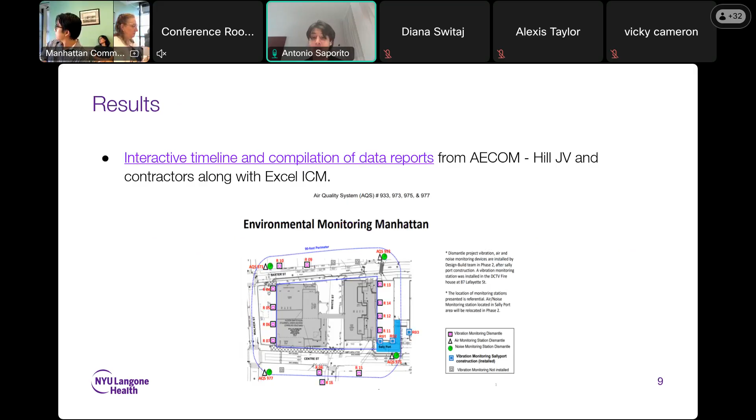As the community was updated every month, we made an interactive timeline and compilation of these data reports from AECOM, JV Hill, and the DDC. We made this online and put it in the packet as well, to give an understanding of all the projects going on concurrently and one after the next, to see the progression of the project. This is for us, and for the community, to better understand how this project was developing despite maybe some delays or some project completions faster than expected, but for us to know and better understand the project.

All right, thank you. So third, we went through and measured and noted the air pollution exceedances that were recorded. If you can go to the next slide, I think one really important takeaway is that these monthly reports often stated that no exceedances were noted. If there's one takeaway I want us, the community, to take from this part of the presentation, it's that the absence of evidence is not evidence of absence.

In spite of these reports giving us this data, they were incomplete for a lot of the months, and incomplete at different sections. So while these reports state that no exceedances were noted, how can this be true if there is a lot of data missing, if we were not able to capture the true concentrations that were emitted from the demolition site?

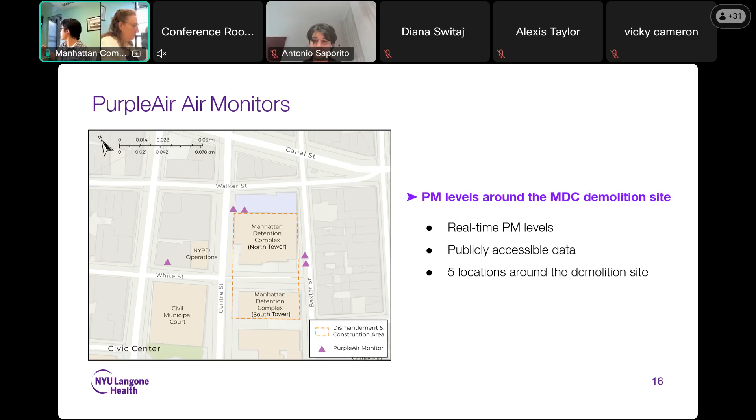And anybody has access to this data. Once it's online, you can go to their website and download the data and do the analysis yourself. We have that, and we also compare it to the levels around New York City. We use this as a baseline to see how much lower or higher the levels around the demolition site are compared to this baseline.

From first glance, what we've noticed is that the levels near the demolition site are consistently either a little bit higher or a lot higher than what's being measured in other parts of New York City. That is one of the red flags we want to point out. Another thing we want to point out is that the Purple Air monitor, even though it's great for things like PM10 or dust, the levels we see might be underestimated, so what we see here might be lower than what is actually being released into the air.

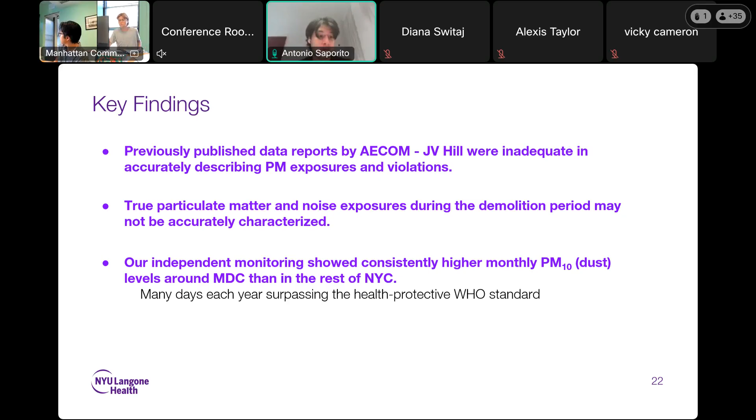And so our findings in this report are to better inform the community, better inform people going forward with other demolition projects, but also to ask for more. So thank you for your time, and we'd be happy to answer any questions.

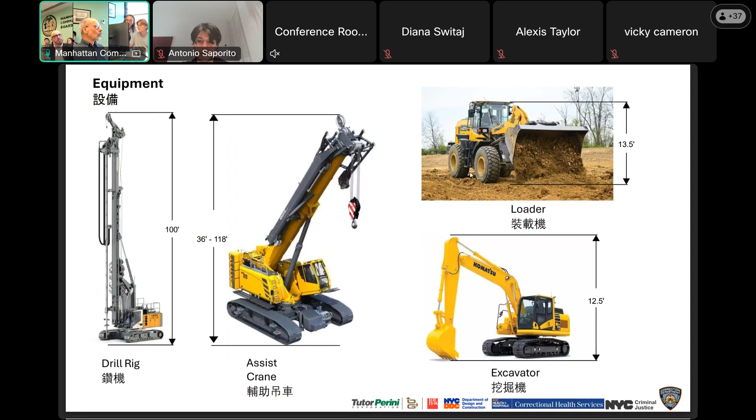So let's talk about deliveries. We talked about the early hours, and we do appreciate sleep, it's very important. But we are constrained for certain sizes of deliveries by the Department of Transportation. A number of these large equipment pieces that you just saw really cannot go through bridges past a certain time, and that's what's causing some of these early deliveries you've seen to date. These are really for the cranes, excavators, these large pieces of equipment required on site. So that's the constraint for the early deliveries anywhere from 4:30 to 7 a.m.

What you'll see this year are the casings, which are on those tubes. Those are part of the secant piles. We also have reinforcement bar, and of course, concrete.

This is the current condition of the site. You see the solid red lines along Baxter and Centre Street - that's our fence, taking one street lane there for traffic. We have the courthouse Sally Port to the south in that gold color. There's a lot of movement there with persons in custody coming in and out, so we coordinate with them almost daily to make sure there's no major conflicts with the buses, which is why the entrance is a little bit further north.

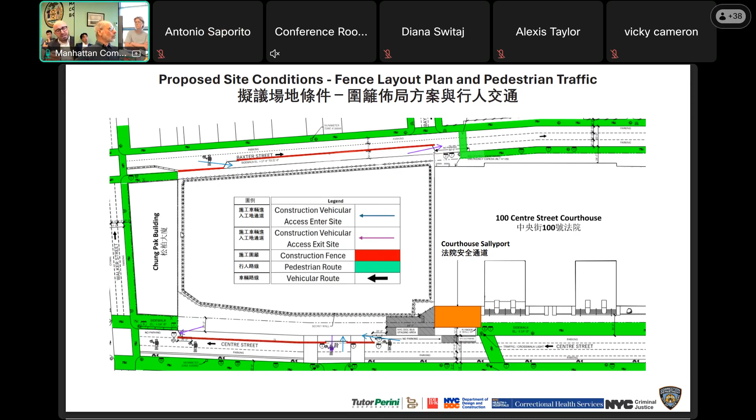Let's go to the next slide. So, work completed - last year, the majority of the work was site validation. We were looking at some borings for geotechnical verification, some environmental test pits to understand where the water level is, and some other details for engineering.

Some existing utility work - Con Edison has been active for the past year. They should be wrapping up within the next 6 to 8 weeks or better with our work around their site and within our site. We've done some utility work on Baxter and Centre Street, surveying, and of course installation of monitoring equipment, which we'll get to in greater detail.

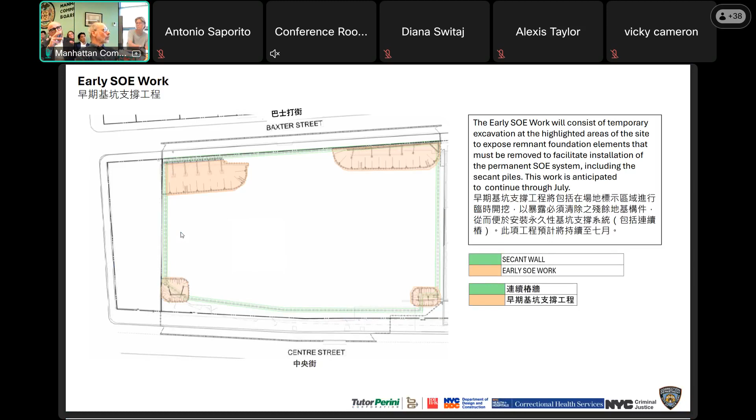2026, here's how we started construction this year. This was in April, when we started looking at these specific areas and began removing some of the old remnant foundation elements. These are the areas we want to focus on for that work.

Every one of those, what's in yellow? And how far down do those go approximately? Those are at the old cellar level, anywhere from 15 to 20 feet maximum.

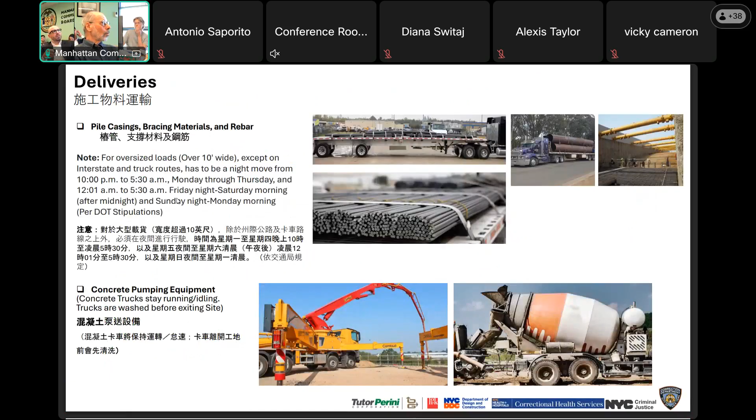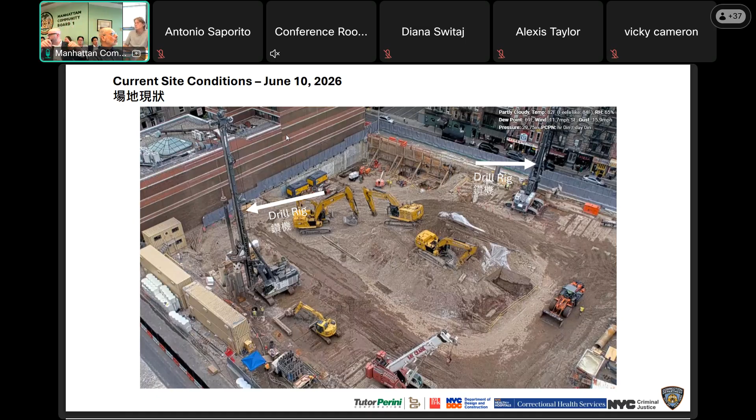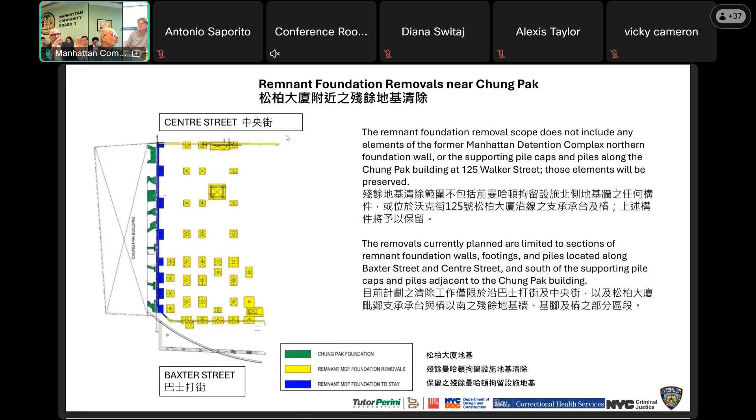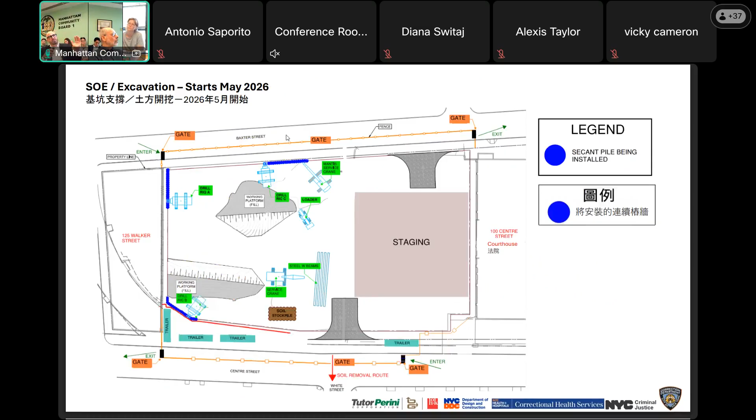So we talked about that - the main message here is that we're preserving the Chung Pak foundation and immediate adjacent footings from the old building. We don't want any impact on those footings. As of May last month, we started drilling, as shown in the aerial shot. The dark blue areas are the actual sequence. As we go further into the year, that operation will move south, toward the right of the screen, and that's when the purple rigs will start working. Those elements are casings, and they're actually part of the foundation.

A better picture to illustrate this - correct. So theoretically, and I don't want to get too technical, but this is the secant pile wall, which is in the perimeter. This serves as a barrier to isolate the water table, or the water.

Slurry? It's not slurry, it's a secant pile wall. A slurry wall, you typically dig a trench and fill it with slurry. In this case, what we do is put cylinders on the ground and guide an auger to remove the soil. As the soil is removed, we fill it with concrete and a large steel beam. These secant piles interlock and create a solid wall that goes all the way to bedrock, embedded into the bedrock by a couple of 2-3 feet, creating a sturdy wall to protect the water.

The caissons - sorry, I had a question about how deep into the bedrock, related to the ones you've taken out that predate this, and how much deeper are these going? The ones that were taken out are not into bedrock, they're down anywhere from 30, 40, 50 feet. The bedrock varies, 80 to 100 feet. So you're going down 80 to 100? Correct, and we're socketing into that.

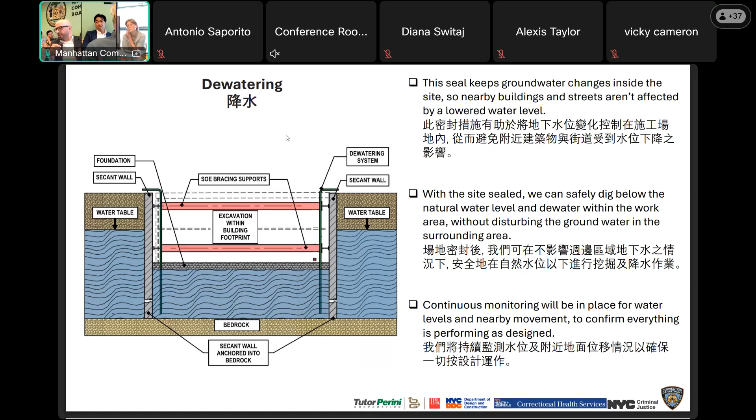Okay, all right. So some additional work that we're gonna be doing this year outside of the site is relocating these fire hydrants to enable us to install some of the utilities and some of the secant piles.

The first one is on Baxter Street. You can see I'm gonna relocate it across, up this image, which is also east. The other one is on Centre - we're gonna move it north, or to the left of the street. So that will be happening this summer.

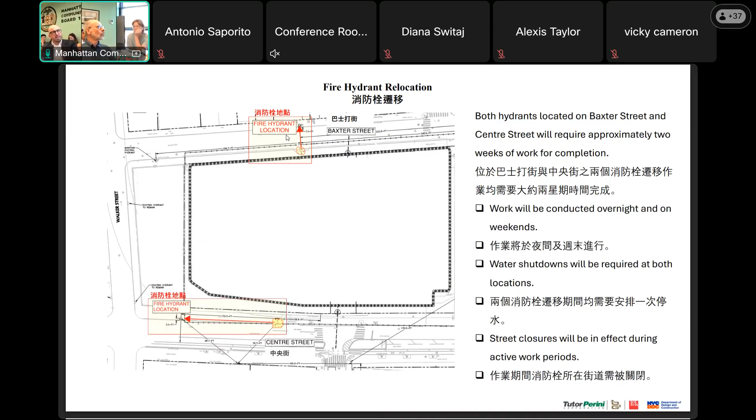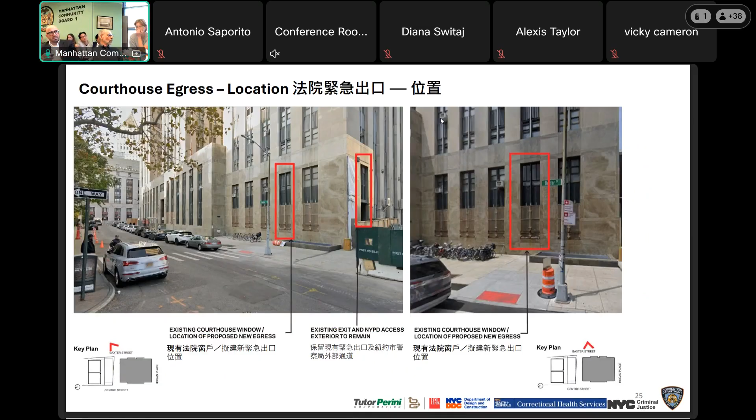To give you a better understanding, the image to the left shows the old and then the new. So what we'll do is take one of these windows - about half of that opening - and replace it with a door for emergency situations, right there. It has gone through Landmarks, PDC, and they are positive about this design. It's going to match the existing building, so that will be the new permanent egress. That will be starting within about a month or so.

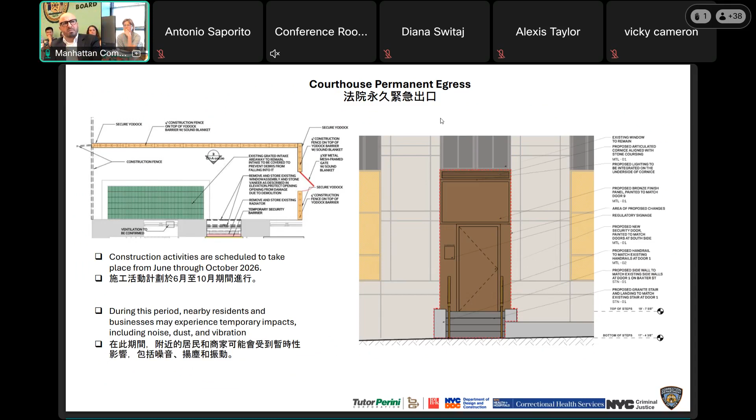Here we're at the important parts. So, community impacts - of course site safety we take very seriously, not just for construction workers, but anybody that steps on the site. To get oriented, they have about a half hour to an hour session in the morning before they are allowed to get on site. We're also getting lessons learned from other areas, from other projects, and applying them here. So you'll see those.

In terms of monitoring the tunnel, our engineer of record has submitted to transit their recommended monitoring plan, which includes the tunnel. The MTA has reviewed and approved this plan, and DOB has also. For the tunnel, we have vibration monitoring, shape arrays, and optical monitors, which measure the movement or shape of the tunnel. So that is an ongoing monitoring process.

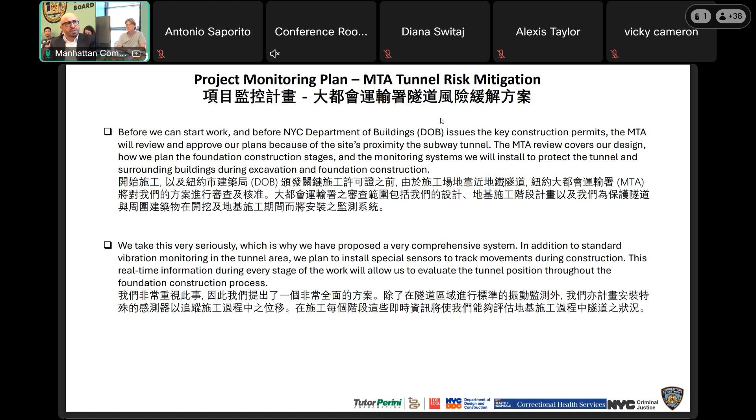Along with that, we have noise monitoring. Before we get to that, let me explain a little bit about vibration and movement. So there are two alert criteria. The first is called alert, which draws attention to an area.

There's a lot of these alerts throughout the day because there's various movements, whether it's from ongoing heavy traffic from the tunnel, or other factors like thermal movement. Some buildings, when they warm up, the facade might shift by a little bit. So that's the alert criteria.

It draws attention to that area. We investigate, see whether it's actually construction related. The limit is a higher threshold that we put a little bit more attention to. We investigate, potentially pause the work, stop the work if needed, and remedy it with mitigation. So that covers both vibration and movement, and of course the noise.

The noise, we're following 85 dBA during the day and 75 at night, which is set by code. And the noise has criteria as well.

The monitoring for dust, we talked about here, the gentleman walked us through the dust alerts. We are measuring PM10, which is really dust. We can get more into the theoretical science about PM2.5 and the emissions that come from various vehicles or kitchens in the area. So PM10 is what we are following, which is the EPA standard.

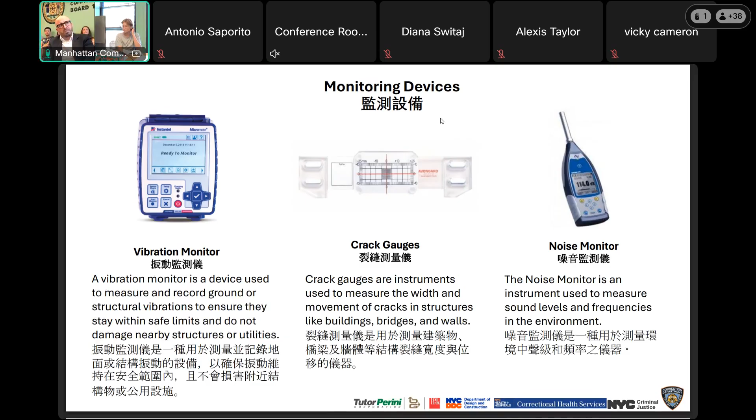A noise monitor, pretty straightforward. AMTSs, or automated monitoring total stations, communicate with these optical prisms. These prisms are mounted on the building - I'm sure you've seen them around the neighborhood. These measure movement.

Dust monitor - this is an actual dust monitor that's static, it stays in place. And then we have handheld monitors. We really want to address the concerns you mentioned about continuity and equipment, so part of addressing that is also having handheld readings throughout the day and reporting out on those.

So this is our site monitoring plan with the locations. You can see surrounding the site within 90 feet, there are a multitude of monitors for vibration, monitoring wells for dewatering, dust and noise, and optical monitoring points.

We did make an exception to the 90-foot requirement from our EOR. We installed a vibration monitor at the firehouse just to maintain continuity from the previous project, so that has been in place. Surveys have been taken - pre-construction surveys of these areas.

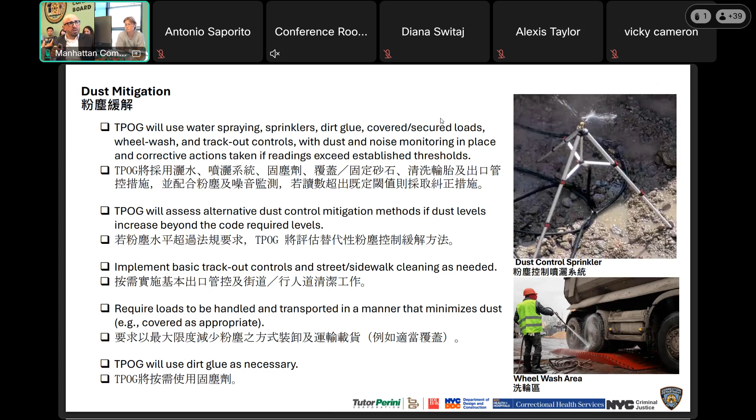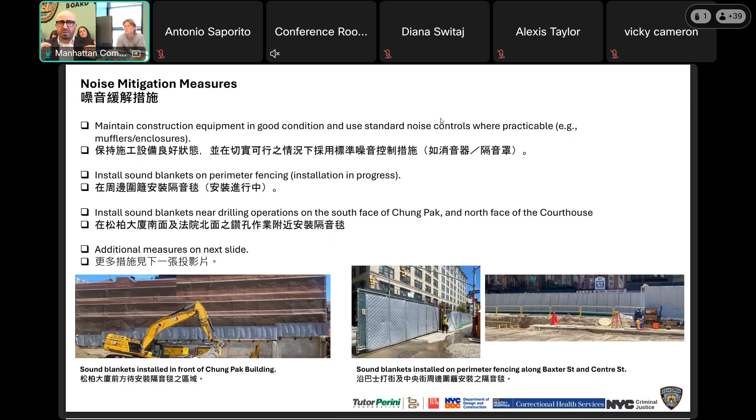Noise mitigation - we have installed sound blankets on our perimeter site fence, and also along the front path. This is to absorb and reduce the bouncing of sound waves off of the equipment. On top of that, we have a secondary barrier of sound blankets. You can see here a picture taken along one of the drilling equipment - sound blankets thrown over that fence.

We have since installed these barriers - you can see in the right image, these are movable barriers that follow the major equipment of the drill rigs, kind of like a second level of sound attenuation.

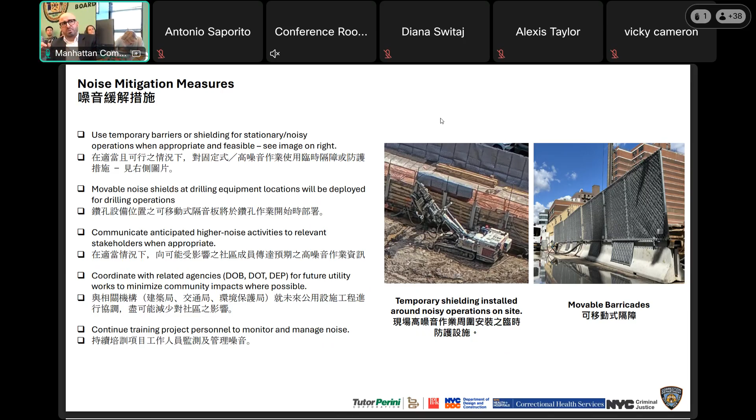So the noise isn't just going to be coming off of here. We want to control the noise as we go vertical, even though that's a few years away. We're looking at other options for our hoists - we're going to be putting covers and sound blankets around those motors for the hoists that are operating, and we're continuing to look at mitigation measures for later stages of construction.

Dust monitors: as we look at the monitoring plan, there are 6 active dust monitors on the site, and of course we have the handhelds as well.

Dust exceedances - we mentioned wind earlier. Wind can affect the readings, both increasing them or lowering them. So we're always really careful in using our handhelds again, staying on top of that to make sure we have as accurate data as possible.

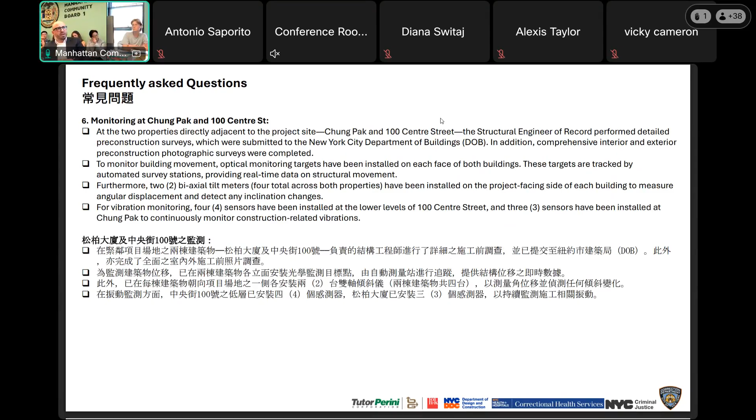Unexpected subsurface conditions - this is relative to environmental. We had some initial environmental borings completed early on in the job. Those borings did not indicate any contaminated soil. As we have been excavating, we have not found any archaeological findings yet - hopefully you won't find any, we don't want to disturb that - or any VOCs.

So we have an archaeologist on site as we excavate, monitoring whatever we dig out. And of course for VOCs, we have our environmental engineer on site monitoring those as we excavate.

Can you define what a VOC is for those who don't know? Sure, it's a volatile gas with certain organic compounds that, after long periods of time, can produce these volatile gases, which are not healthy at all. We have not found these yet. They typically come from things like petroleum or benzene. It's not my background, but that's basically what a volatile emission would be.

And dewatering contamination - as we are extracting water, we have certain guidelines set by our permits, which were reviewed by the Department of Environmental Conservation, and we're following those. We're using a settling tank, so as the water comes out, any solids can sink, and any natural oils can rise to the top and be separated from what we discharge.

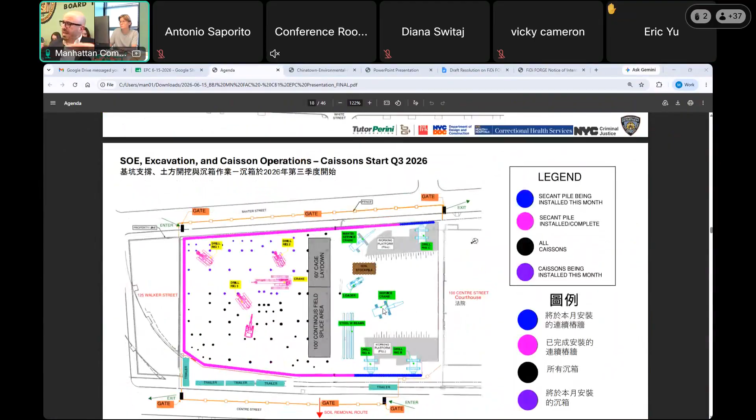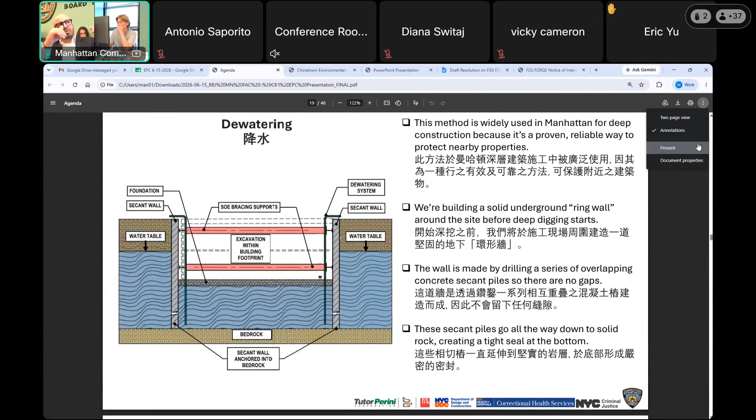That's a great question. If we go back to the image, the water table outside of the perimeter of the project is not gonna fluctuate from hour to hour. It's gonna maintain the same characteristics as it has. So you can see the water table on the outside limits, that will be maintained. There's no dewatering going on outside.

The dewatering is happening within those walls. As you can see, the dewatering system—it's kind of hard to see there—there's piping that's going down within the site, the secants. That's to make sure that the level on the outside is maintained, and it goes all the way down to bedrock. I know the intent, but it's not really an exact science. There are points of risk with the dewatering process, and there are other issues that happen in the bedrock, or if water goes down further.

So is the groundwater limit noted in the report saying that the water outside the site could go from 2 feet or even some change? You're correct. So Langan, the report you're referencing, is our geotechnical engineer, so we're taking them very seriously. They're some of the best in the world. That negative 2 is monitored outside the site. Right, okay. George, if you can show the monitor.

I was also previously a geotechnical engineer, so this is a little bit in my wheelhouse. Do you mind if I explain? Please, go right ahead. So these secant piles create a sealed bathtub around the site. They're socketed right into the rock, so there's no water going underneath the secant piles.

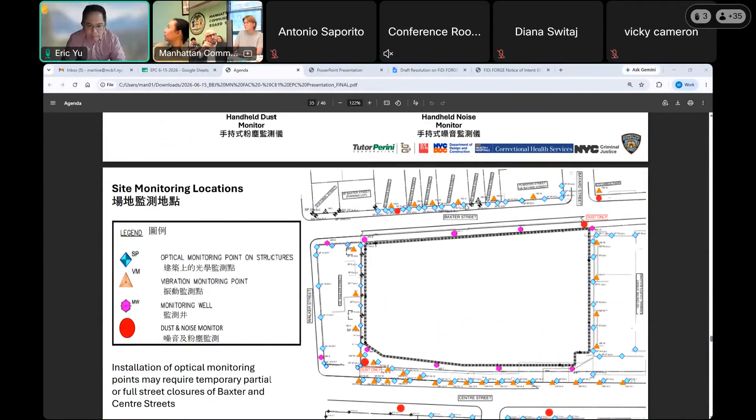It would be awesome, Alice. May I ask a question? Sure. Eric, is that Eric? Yeah, sorry. So I heard and I saw in the presentation about the vibration monitoring equipment - does that also include elevation changes? Because you mentioned that with the dewatering, that could cause some of the buildings to settle, not due to vibrations, but just settle because of changes in groundwater.

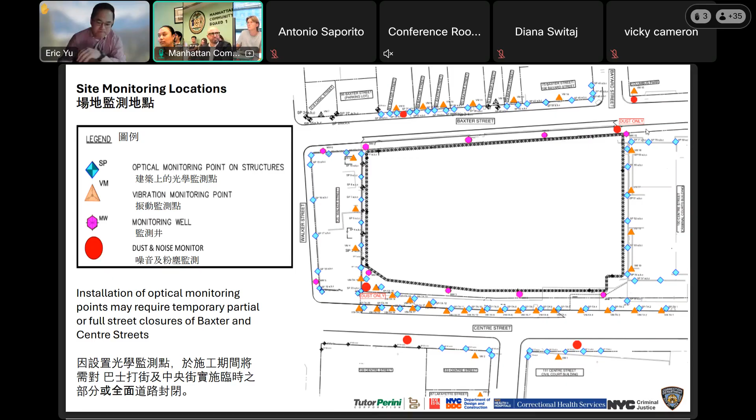So is elevation also monitored? Movement is monitored, which is beyond just vibration - any type of movement on those buildings, our optical monitors will be able to pick that up. Thank you. Okay, I think we're coming to a close. I'm looking around the room - we have two more hands, and then we'll close it down.

We didn't hear the answer to whether or not you're gonna be fully closing Baxter and Centre when you do your installation - fully closed? Installation monitoring - no, it's done. This has all been installed already. So we have two more questions.

Okay, John Alpert. Hi, John, thank you very much. And in the collaborative spirit that you asked us to try to achieve, I'd like to say let's go Knicks and let's go Cape Verde.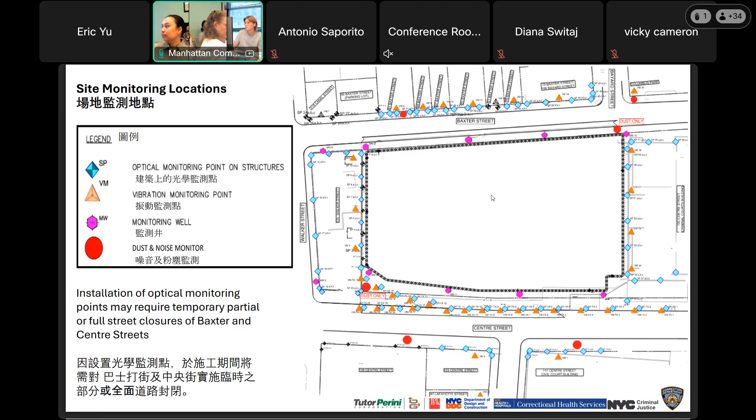But these plans for dewatering are pretty scary, and they're even scarier now that you guys have hired away our independent geotech engineering firm and put them on your payroll. In trying to replace this protection for our vulnerable firehouse, I've been talking to other engineers, and when I showed them your bathtub plan, they started rolling their eyes. They say yes, it sometimes works, but it sometimes doesn't. They thought it would be important that you pledge to put piezometers in all the vulnerable sites and allow us access to those readings, because of the points that Vera and Jan and other people have made - your reporting on dangerous situations hasn't been so good. So would you guys commit to putting piezometers in the dangerous buildings so we can know when our water table's going down?

Sean, can you respond? I don't know if you heard the question. I'm sorry, the audio is pretty garbled, and I didn't hear what the question was.

I met with John and he was explaining whether wells could be put either in his building or in the foundations of his building to monitor the water level throughout the project, and whether that monitoring could extend beyond the current area, since his building is not within the monitoring area. It is a landmark building, and the monitors were taken off this building after a previous incident.

You mean a piezometer? Yeah, piezometer. I thought you addressed that this morning. So, to the extent of the water table, we are monitoring exactly the area where the dewatering would be happening. I'm not sure who you spoke to, but if we're monitoring the water table outside of the site, it won't have any effect down the street.

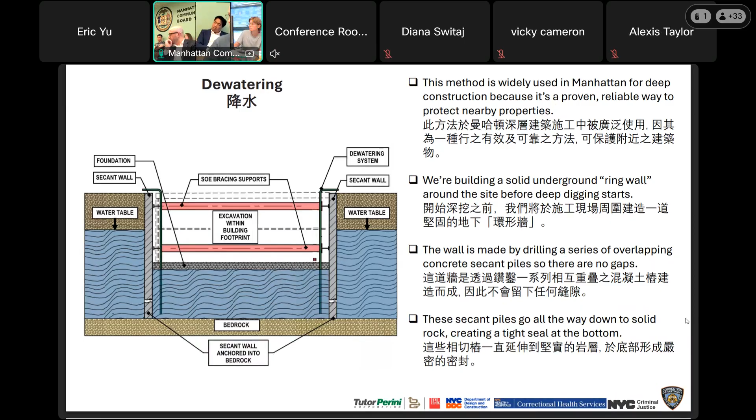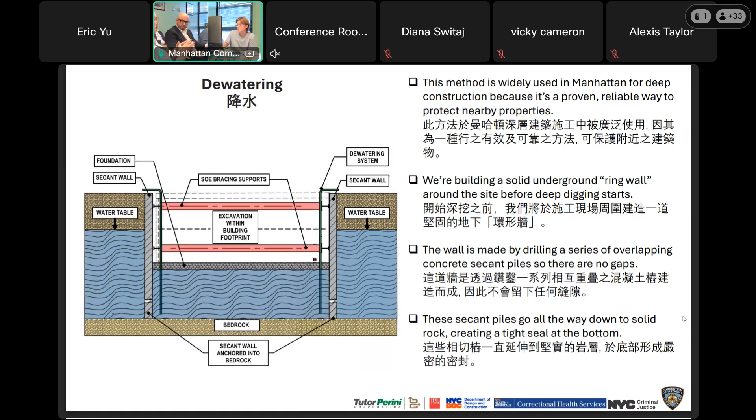You mentioned sea level rise and how that would affect things here - I think those would be really important conversations to have. This is the first time we're going down to bedrock in this area. Nothing's gone down, period. So this is extraordinarily unusual for anywhere else in this area. There's nothing else this deep, nothing else this tall, and I'd like to hear more versus 'don't worry, we're gonna be fine.' See what kind of engineering reports you could share with the community board for the surrounding neighborhood.

I'm not worried about the courthouse, I'm worried about the small, old buildings. We appreciate it, we just ask DDC and we'll see a little bit more. Just to be clear, the courthouse foundation does go down to that depth for the project. I understand, but that's the courthouse, and that's been there quite a long time. When was the courthouse built - 1920 something? 1928, right? This is 100 years later, basically, that we're talking about.

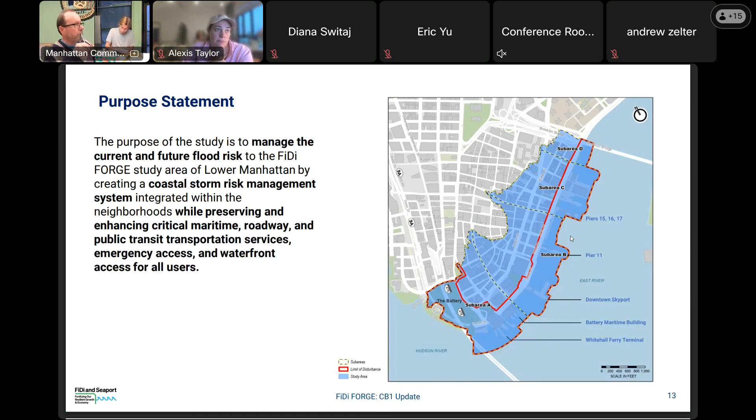Next slide. The objectives we've developed are based on the FIDI Seaport Climate Resilience Plan and all the engagement we've done to date, and these objectives are listed here.

They include providing a coastal storm risk management system to reduce risk for the FIDI and Seaport City area, to maintain the functionality and reliability of the transportation system, to maintain water transportation services along the East River including the ferries, to maintain and increase vehicle and pedestrian access to and from waterfront destinations as well as historic and tourist areas, to reduce the risk of mobilization by prioritizing passive coastal storm risk management infrastructure, and to balance initial investment with providing comprehensive flood protection.

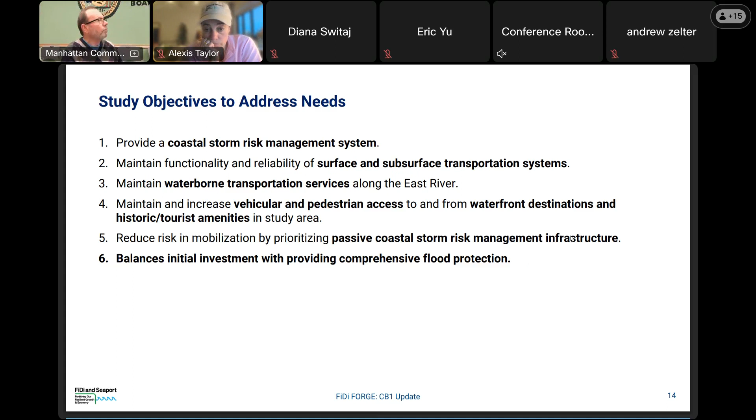And now I'll pass it back to Alexis to wrap it up. Thank you. Just confirming you all can hear me. Yes, okay, great.

You can all read the public notice for scoping, and additional information is now live on EDC's website. We hope you will attend either the in-person scoping meeting on June 23rd at 6 p.m. at the National Museum of the American Indian, or our virtual meeting on June 25th at 6 p.m. You can RSVP to either on our website.

The public is welcome to submit comments on the scope of the study through July 14th, to the Army Corps of Engineers email address provided. You can always sign up to be on our email list, and you will also receive this information. Thank you for inviting us, and we will stop here.

Can I make a quick ask? Alexis, unfortunately the two dates you have in June both conflict with community board required meetings. Sorry, can you hear me? June 23rd there's a mandatory in-person training from 6 to 7:30, and June 25th is our full board meeting. The 25th was always going to be our full board meeting, so neither June date works well for CB1. What time is the meeting for them? Their in-person scoping meeting is 6 to 8, and ours is 6 to 7:30.